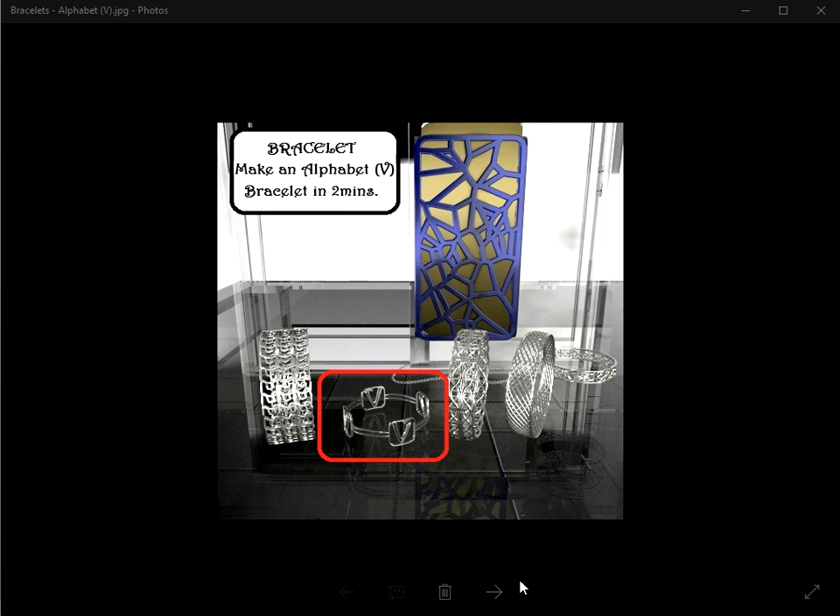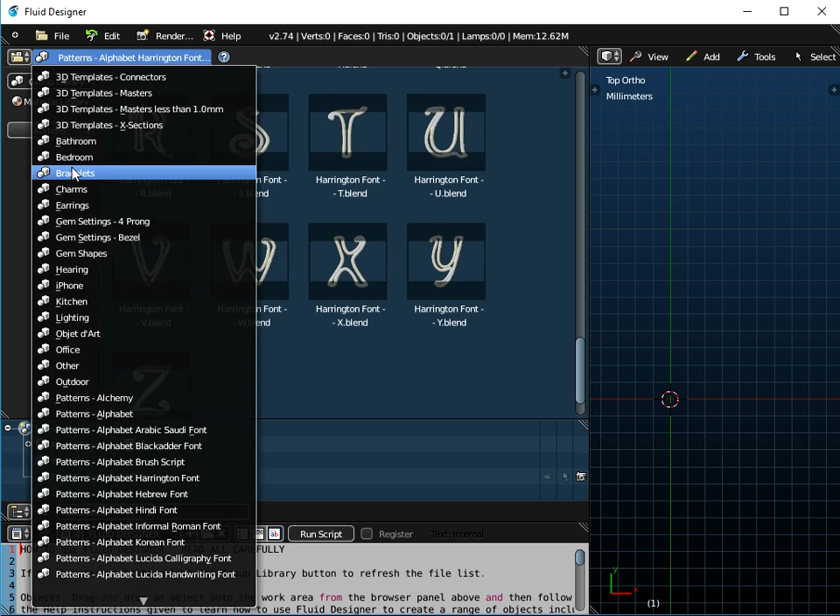Hello there, I'm going to show you how you can make this personalised bracelet here with the letter V in, using Fluid Designer for 3D printing. And the way that we're going to do it is I'm going to use a Harrington font, so I'm going to use the letter V from Harrington Fonts and add it to one of the basic bracelets here, which is this square 4 bracelet as shown here.

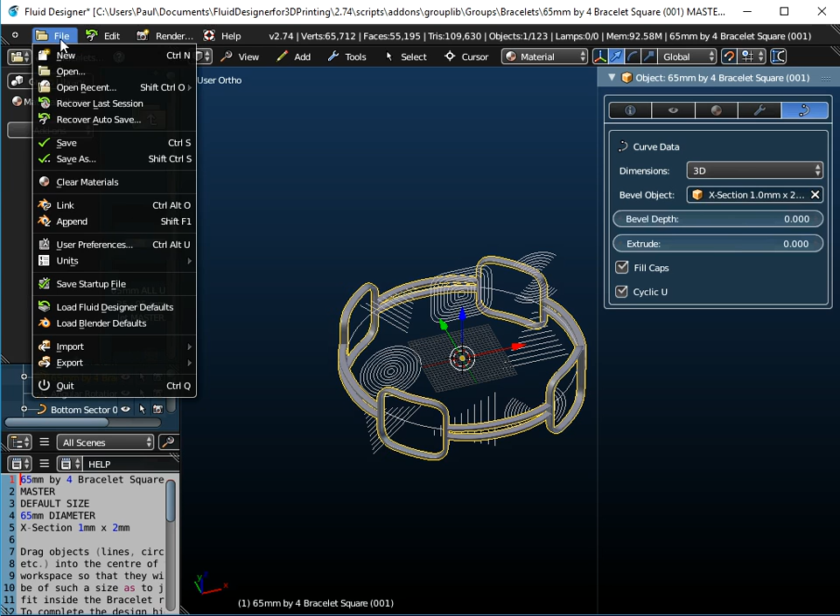Now I could put these objects into the bracelet and create patterns from them, but I'm not in this instance. I'm actually going to add a letter to this, so what I'm going to do is go to File and Append. We just go up through the menu system until you get to the Groups folder, and I want Harrington Font - you can use any letter. I'm going to use letter V, and we're just going to append that one from the library.

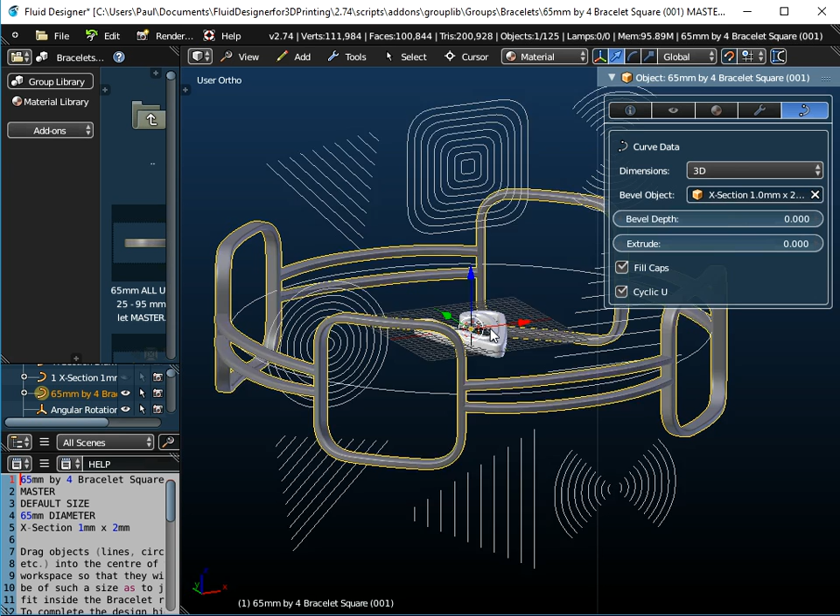So if I just zoom in on that, now there's the letter V. Now the bracelet itself, as you can see, it's at sort of 90 degrees to that, and there are 4 of them at the moment. So I'm just going to switch the count down to 1 because this is just an object that's replicated, and I need to rotate my V about 90 degrees. So if I do R on the keyboard, X on the keyboard, and 90 for 90 degrees, it's now at the right sort of angle.

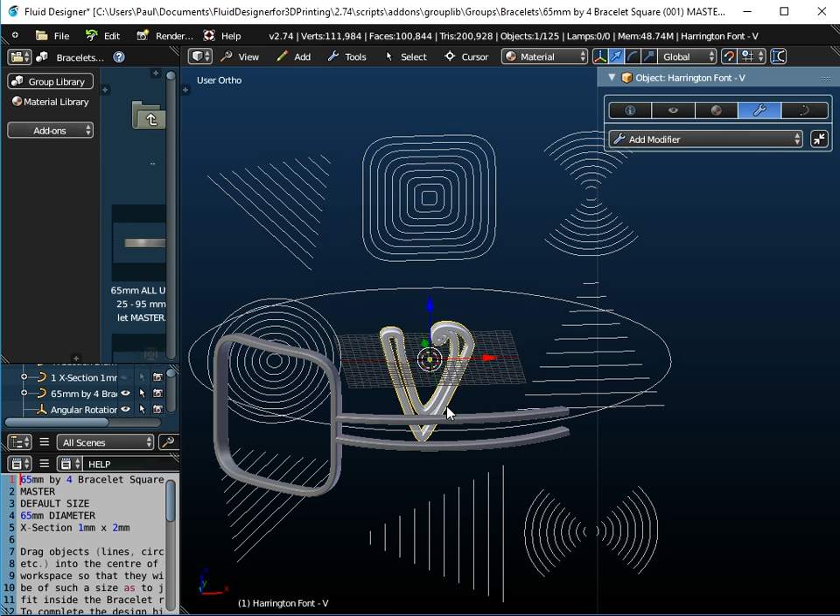What I need to do now is if I just highlight the bracelet and press the tab key and go to View and Front, you can see that my letter V is not fitting exactly inside here, so I need to move it up slightly.

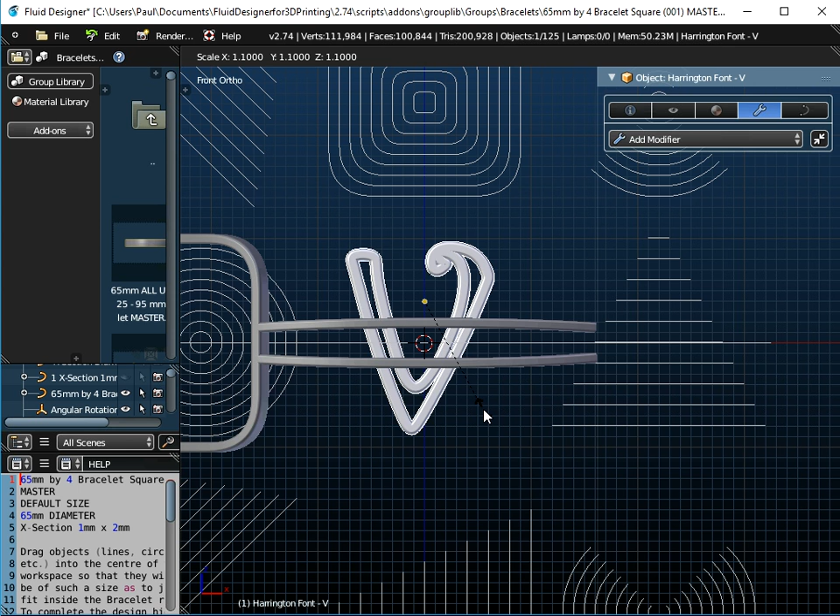And I also need to scale it up. So if I just press S on the keyboard and scale it up, and when you're scaling in Fluid Designer, always do Control A and apply the scale. And if I just select my bracelet again now, you can see it's fitting reasonably well now.

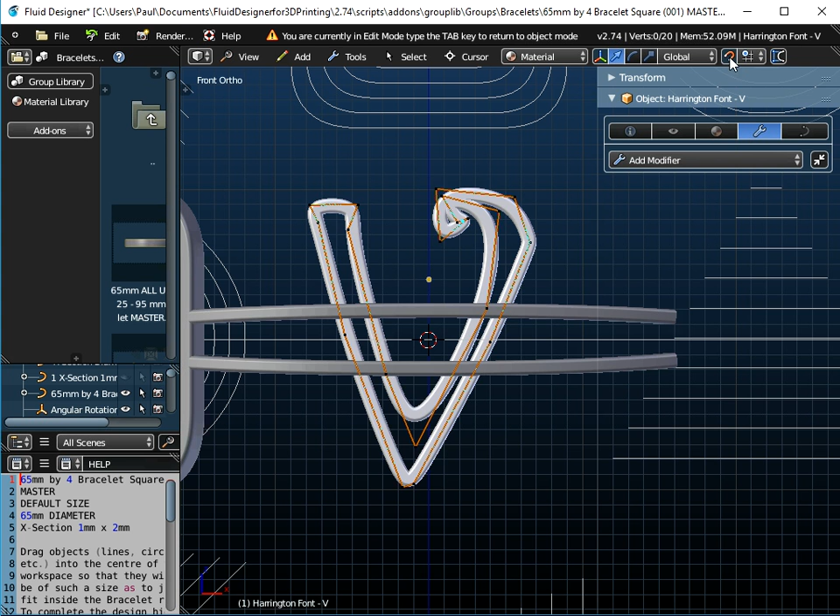I just probably need to extend it more into the bracelet at the bottom and at the top. So I'll just hit the letter V again and go into edit mode, switch off the snap, and highlight those 2 control points there, and move that up so it will overlap the bracelet better. And I'll go down at the bottom here, move that down slightly so it will overlap the bracelet better, and just double check. Yeah, that's looking okay now.

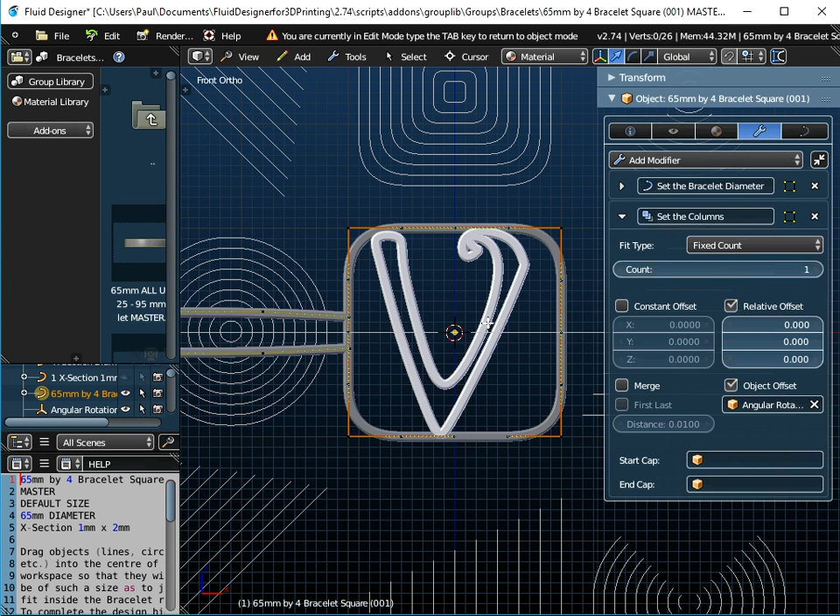The only thing is now when I join this to the bracelet, I do know that it'll flip it backwards. So what I need to do is rotate this - R on the keyboard, Z, and 180 degrees. So I've just turned it back to front now.

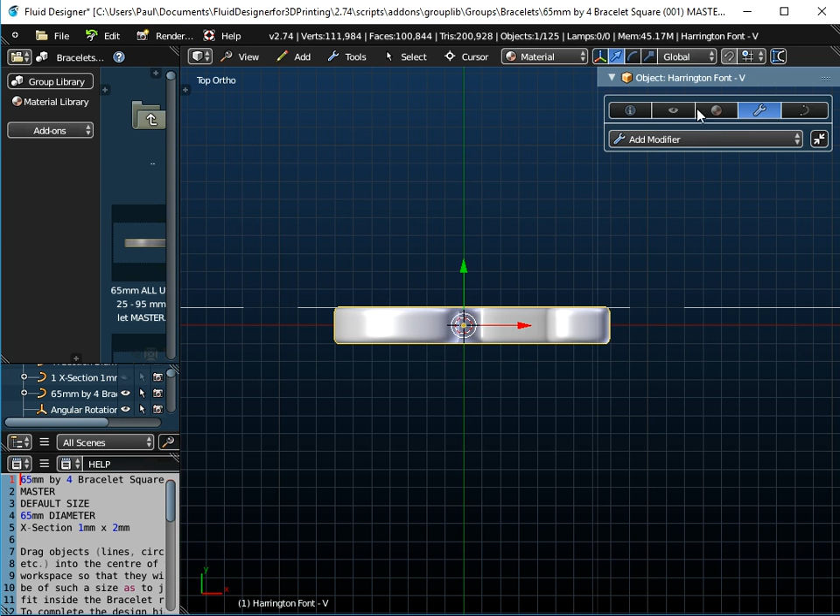And I also need to actually line it up so the bottom of this is touching the X-axis. So I've gone to top view. Let me just switch the snap back on so I get it accurate. So the bottom of that is just touching the X-axis now. So with the V highlighted, if I hold down the Shift key and highlight the bracelet and go to Tools, Object Tools and Join, notice that V fits neatly into my bracelet there now.

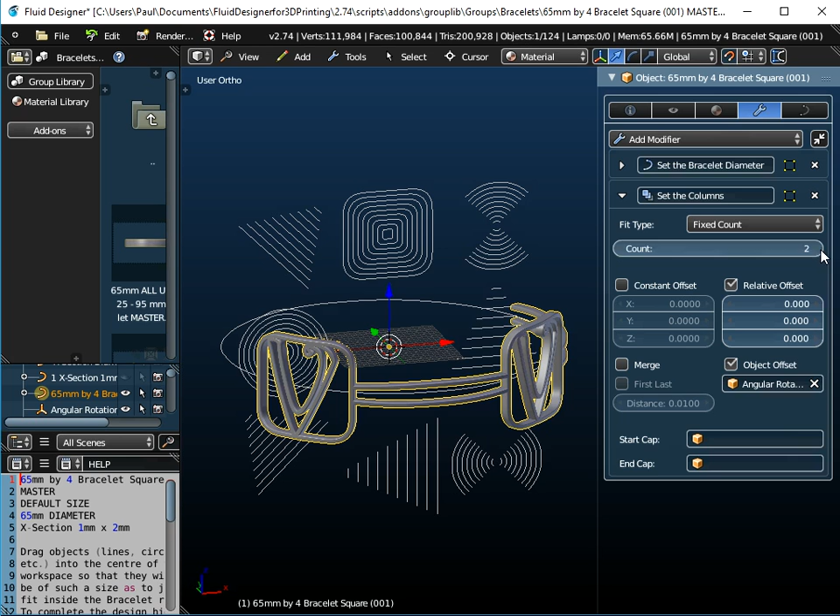And all I need to do is make 4 copies of it using the count. So that's how easy it is. I mean, it took me just over 3 minutes to do rather than 2, but as you can see, it's pretty easy to actually add objects to here once you've had a little bit of practice.

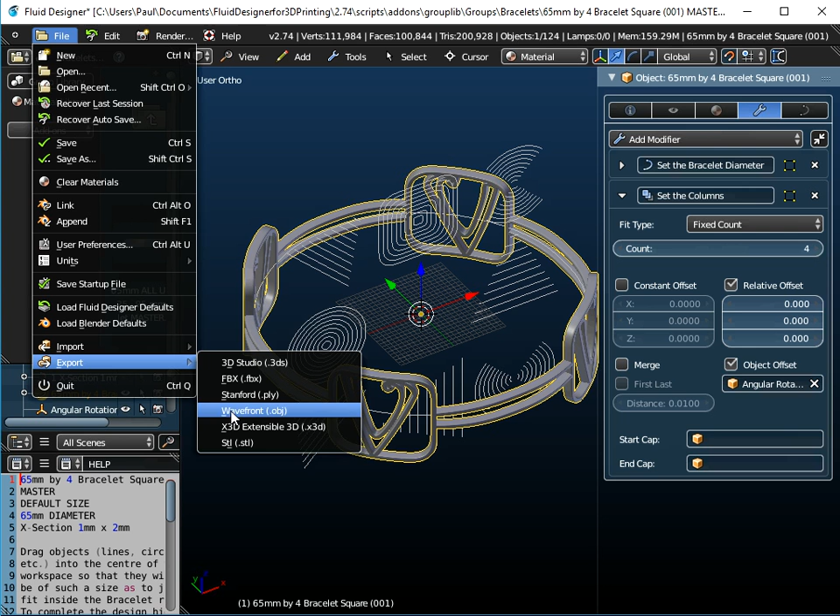So now what you would do with this is export it as either an OBJ or as an STL file, and just run it through Netfabb Basic to make some minor repairs to it, and you would have your finished personalised bracelet with the letter V in it.

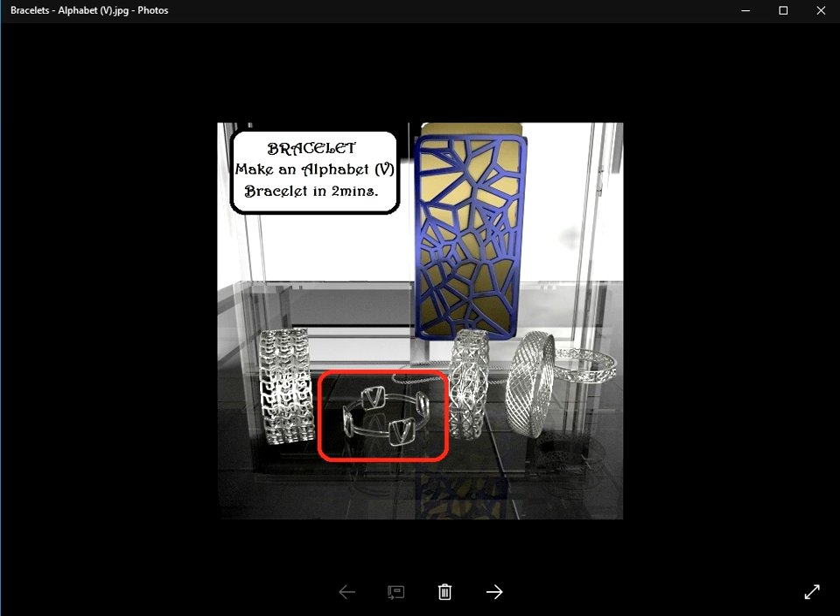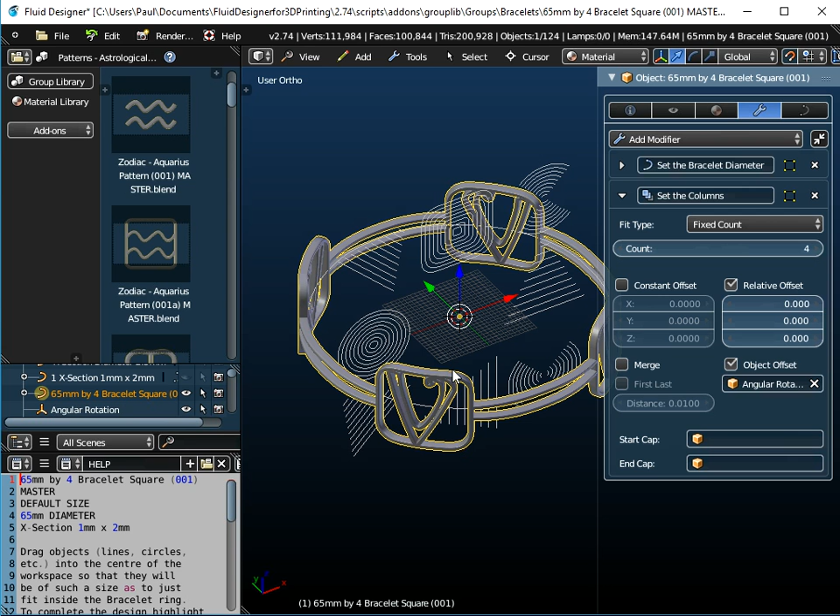And you can put anything, any kind of pattern into there from our system. So you can put, whoops, if I just click Group Library, you can put Harrington Fonts, any of these letters in, or you can add anything else from the system as well. So you could put an astrological pattern in there, but you've just got to play around. Whatever you want, really. Alright, so good luck.